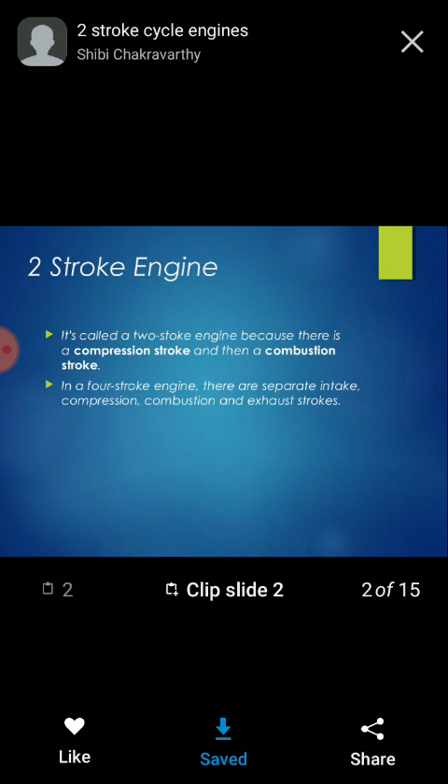Today I will be discussing the two-stroke cycle engine. That is a very important topic, and many questions arise from this topic in competitive exams. It's called a two-stroke engine because there is a compression stroke and then a combustion stroke. In a four-stroke engine, there are separate intake, compression, combustion, and exhaust strokes.

Two-stroke cycle engines mix special two-stroke oil in with the gasoline. They mix oil in with the gas to lubricate the crankshaft, connecting rod and cylinder walls. Note, if you forget to mix in the oil, the engine isn't going to last very long.

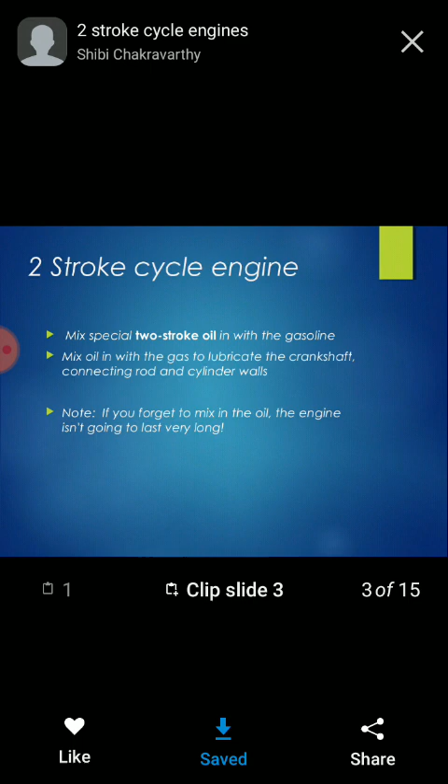Advantages: two-stroke engines do not have valves, which simplifies their construction and lowers their weight. Two-stroke engines fire once every revolution, while four-stroke engines fire once every other revolution. This gives the two-stroke engine a significant power boost.

Two-stroke engines can work in any orientation, which can be important in something like a chainsaw. A standard four-stroke engine may have problems with the oil flow unless it is upright. These advantages make two-stroke engines lighter, simpler, and less expensive to manufacture.

Two-stroke engines also have the potential to pack about twice the power into the same space because there are twice as many power strokes per revolution. The basic components of the two-stroke engine and their relative positions are in this figure.

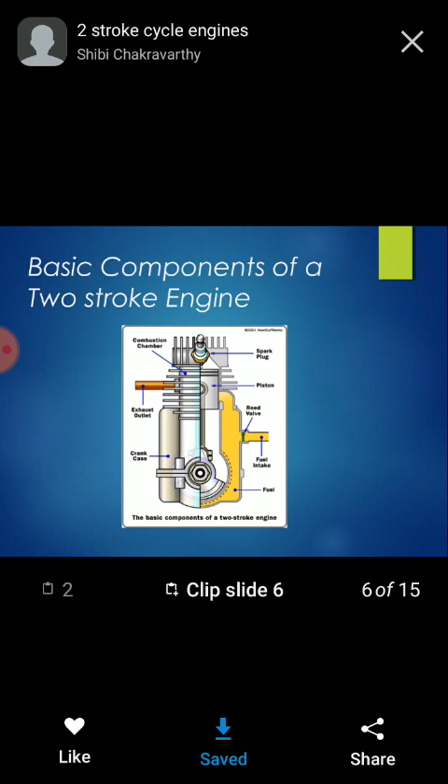Now disadvantages: two-stroke engines don't last nearly as long as four-stroke engines. The lack of a dedicated lubrication system means that the parts of a two-stroke engine wear a lot faster.

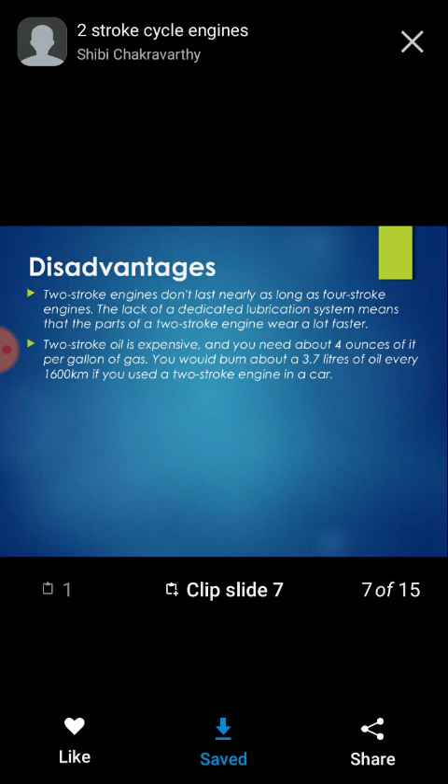Two-stroke oil is expensive, and you need about 4 ounces of it per gallon of gas. You would burn about 3.7 liters of oil every 1600 kilometers if you used a two-stroke engine in a car. Two-stroke engines are not fuel efficient, so you would get fewer miles per gallon.

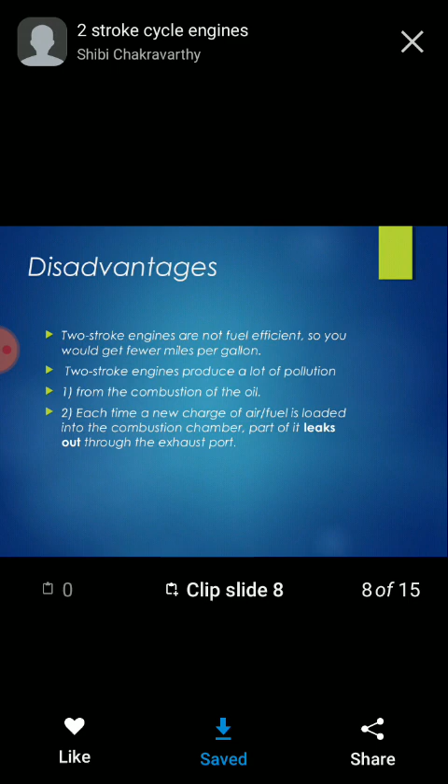Two-stroke engines produce a lot of pollution from the combustion of the oil. Each time a new charge of air-fuel is loaded into the combustion chamber, part of it leaks out through the exhaust port.

Exhaust: the fuel and air in the cylinder have been compressed, and when the spark plug fires, the mixture ignites. The resulting explosion drives the piston downwards. Note that as the piston moves downward, it is compressing the air-fuel mixture in the crankcase.

As the piston approaches the bottom of its stroke, the exhaust port is uncovered. The pressure in the cylinder drives most of the exhaust gases out of the cylinder, as shown in exhaust.

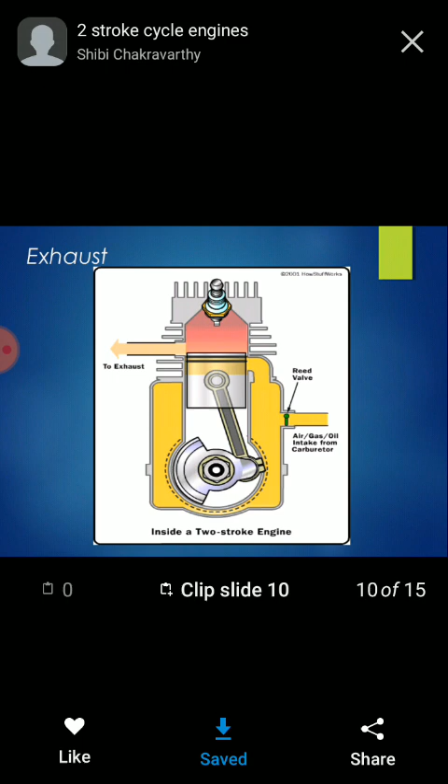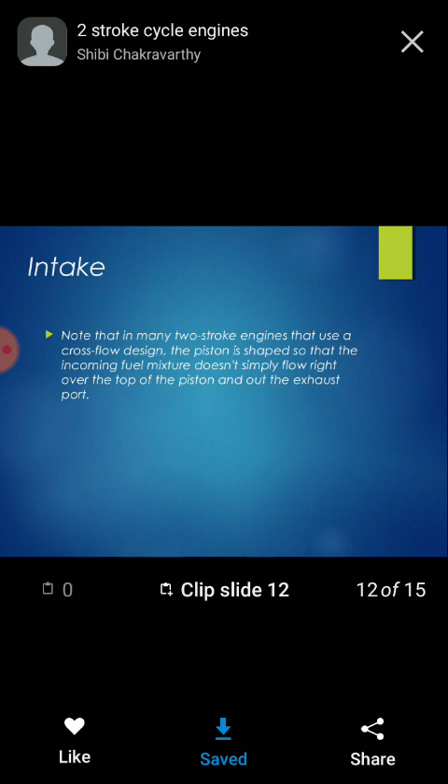Note that in many two-stroke engines that use a cross-flow design, the piston is shaped so that the incoming fuel mixture doesn't simply flow right over the top of the piston and out the exhaust port. Intake: fuel intake position of the two-stroke engine.

Compression stroke. Now the momentum in the crankshaft starts driving the piston back toward the spark plug for the compression stroke. As the air-fuel mixture in the piston is compressed, a vacuum is created in the crankcase. This vacuum opens the reed valve and sucks air, fuel and oil in from the carburetor.

Reed valves are a type of check valve which restrict the flow of fluids to a single direction, opening and closing under the changing pressure on each side.

Piston function. On one side of the piston is the combustion chamber, where the piston is compressing the air-fuel mixture and capturing the energy released by ignition of the fuel.

On the other side of the piston is the crankcase, where the piston is creating a vacuum to suck in air-fuel from the carburetor through the reed valve and then pressurizing the crankcase so that the air-fuel is forced into the combustion chamber.